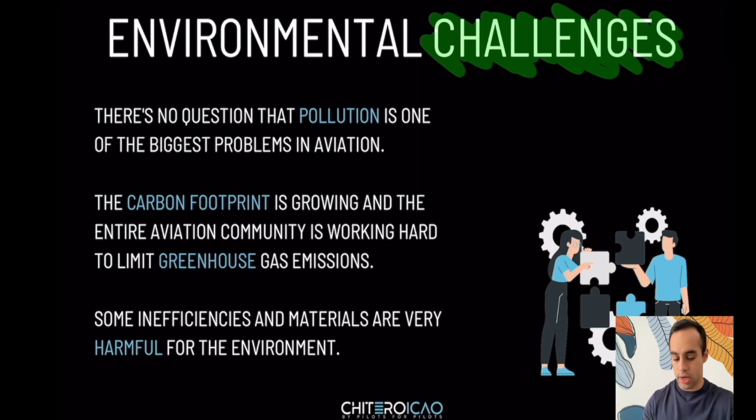I know it's a beautiful paragraph, but what I want you guys to focus on is this, the vocabulary, all right? If you want to write this down, like the main vocabulary, this is something you can do that will help while you're studying. For example, you have your notebook there. You can write something like this: environment. You can have the keywords here.

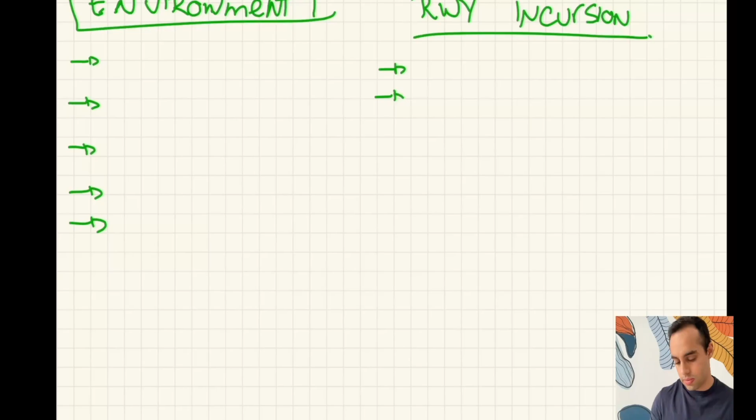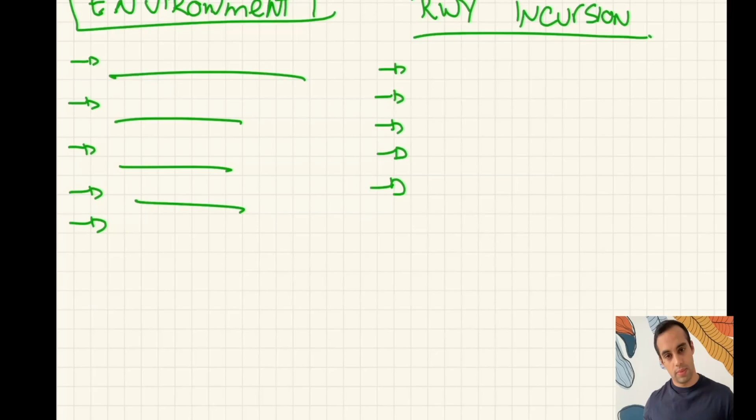And then last class we talked about runway, so you have runway incursion. You have the keywords here. Now what do you have? You have all the topics we normally discuss in aviation and all the keywords. If you have around 10 keywords and you are nervous in the test, you will probably remember 5. 5 is enough to do a perfect test.

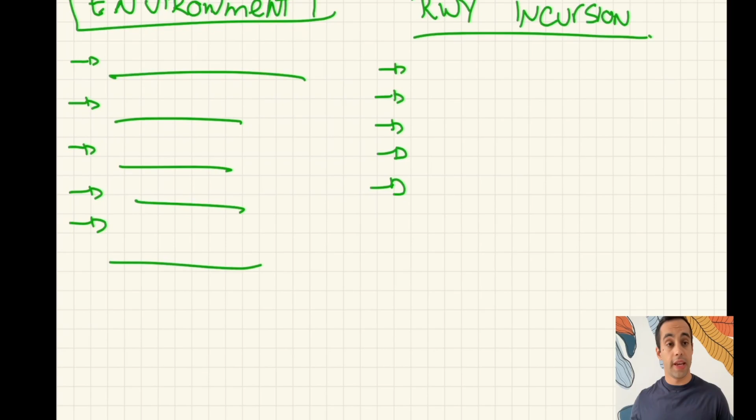Okay, so start writing down all the keywords and all the necessary things so you can pretend you know a lot about the topic. All right, so here I want you to make sure you know, you always mention pollution, carbon footprint, greenhouse gas emissions, and harmful. Harmful means it's dangerous, it's a problem. And guys, help me here: what is greenhouse gas? I know most people never heard about this, and some of you have. Perfect, that's it.

If that's not the translation, I want you to pause it right now and look for the meaning. So normally when we have pollution, we have...

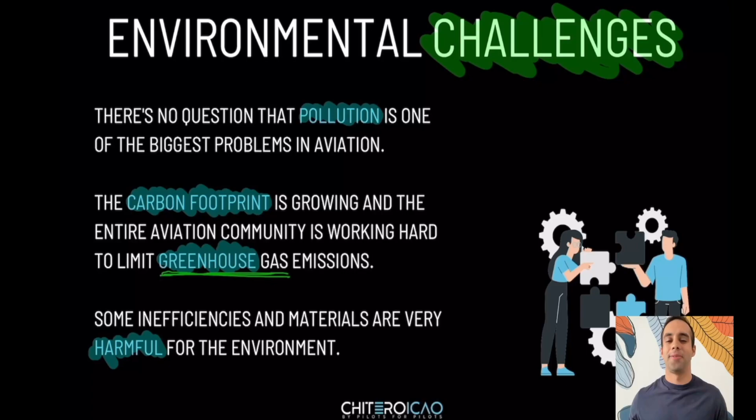Greenhouse gas emissions, and consequently we have a carbon footprint. Carbon footprint is basically a way to measure the impact you have on the environment. And aviation, as we know, we burn a lot of fuel. The noise is beautiful, but we burn a lot of fuel, and actually we are bad for the environment. The emissions and everything is pretty bad for the environment. So this is a way for you to study.

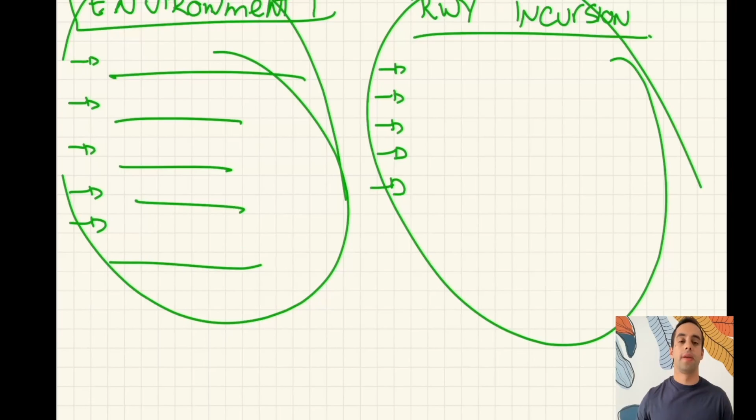Topic, keyword, topic, keyword. That's what I want you to do, right? So guys, when we talk about something as important as environment, flight safety, future, we have some players. We have some people that can help. It's not only one person or one entity that will help.

Now, we hear a lot about the aviation industry. Oh, the aviation industry, the aviation industry. Who belongs to the aviation industry? Who is a part of this? Can anybody help me, guys? Who is the aviation industry? What can we put here?

Manufacturers, beautiful. Companies, perfect. Manufacturers, companies, operators, whatever. What else? Airports. Airports, nice. Any other idea?

Who else? I'm waiting. The clients. No, the clients, I wouldn't put them here because they're the clients. There's nothing they can do. For example... I'm trying to set this up, but I'm just making a mess.

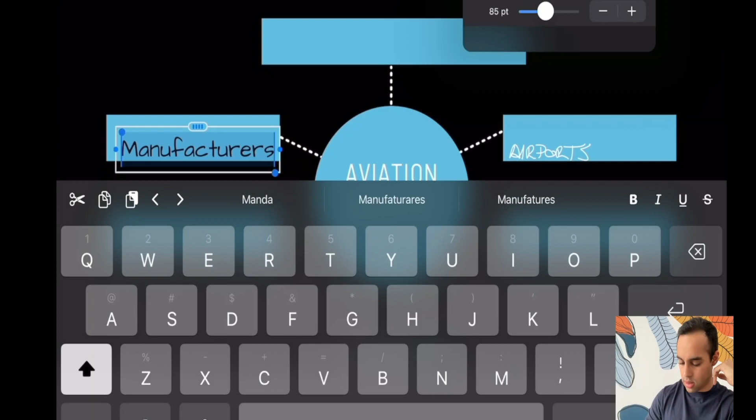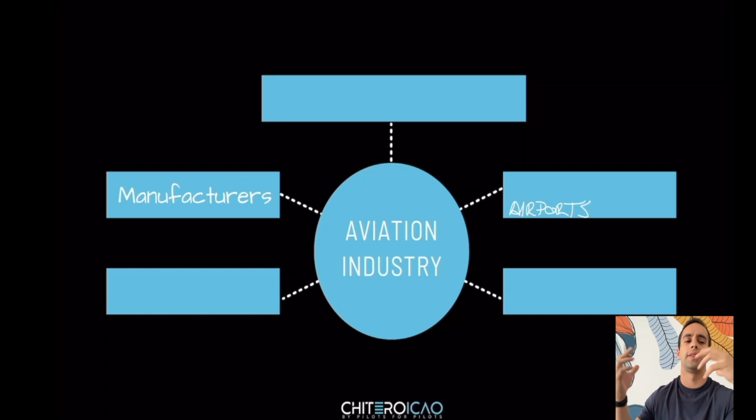So you guys are telling me you are not a part of the industry? You are not a manufacturer. You're not a company. You're not an airport. You're a pilot. So pilots are a part of the aviation industry, right? We can mention, of course, the flight attendants, mechanics, everybody, the personnel, the people. But let's talk about ourselves. Let's talk about pilots here, okay? I'm gonna limit this to pilots because this is a place where we can make an impact.

God, I don't know. I think this is in Portuguese. Okay, that's why. That's why it's correct and everything.

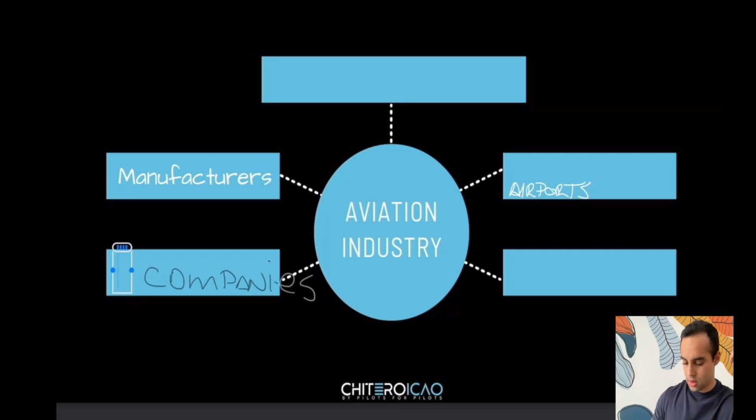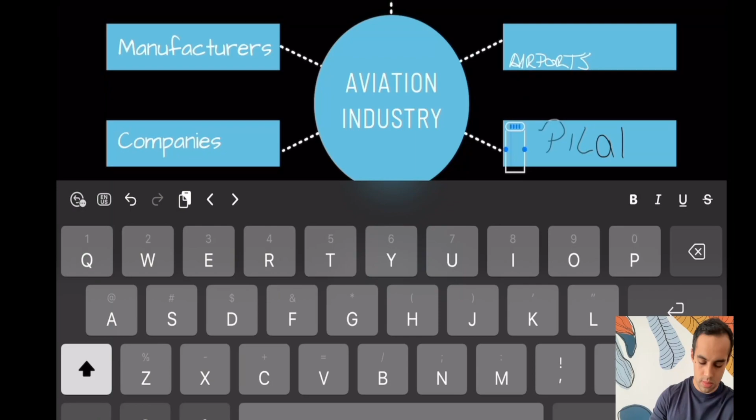So we have the companies, we have ourselves. This is horrible. So we have ourselves, we have the airports, and who is the ultimate one? The one that makes us angry all the time.

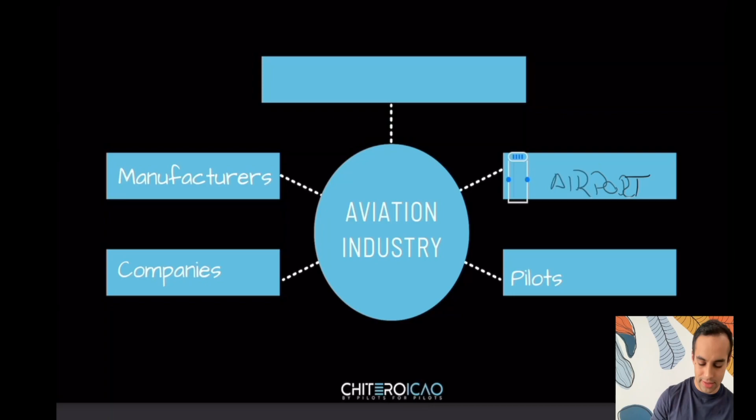Regulations. Good. Who creates the regulations? It's like ANAC, perfect. So those are the aviation authorities. So we have the authorities. Good, they create the regulations.

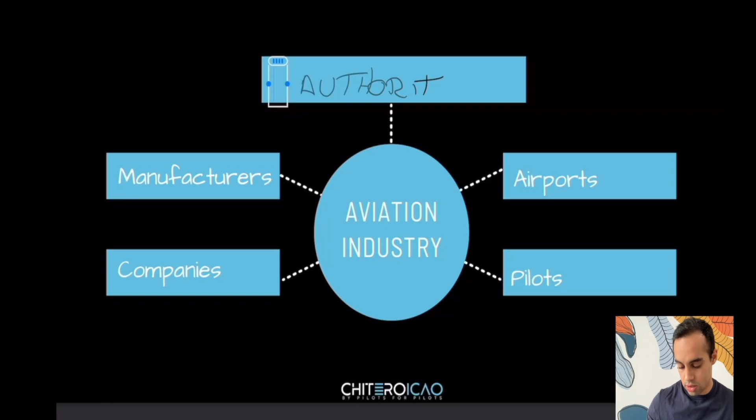So I think it's pretty safe to say that this is the aviation industry. Of course, I might be forgetting someone, as I already said. Pilots are a part of the aviation industry.

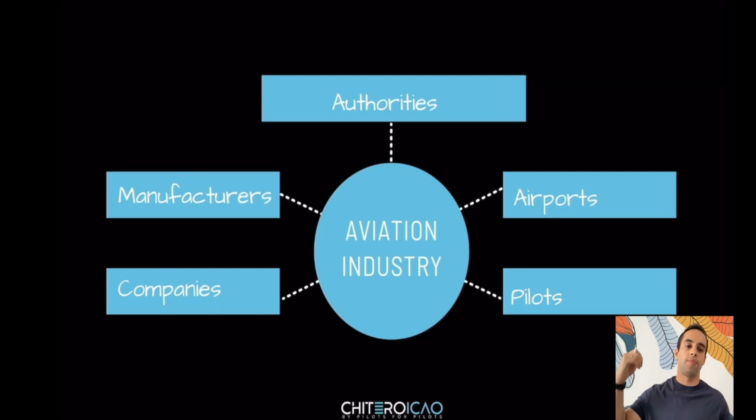This can include everybody, ground staff, people who work in the terminals, with the passengers who load the airplanes, cabin crew, mechanics, supervisors, whatever. Let's talk about ourselves here. So basically for us, the aviation industry will be the authorities, manufacturers, companies, airports, and pilots.

So everybody here has to do their part. And this is important, especially for the test, because as I said, it doesn't matter if the authorities create regulations, pilots don't follow. If the manufacturers create new engines, airlines don't buy. Or if the airports create new procedures and the manufacturers don't comply with it. Doesn't matter, everybody has to work together.

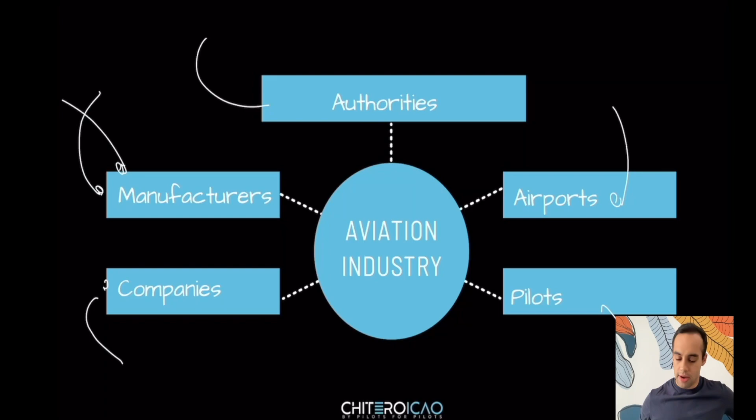So everybody together will shape the aviation industry. It has to be a joint effort. So, for example, of course we might have problems or whatever, but normally aviation authorities, they talk to pilots, they talk to the companies, they talk to the manufacturers. They will create the guidelines, based on this feedback, they will create everything and everybody will do their part.

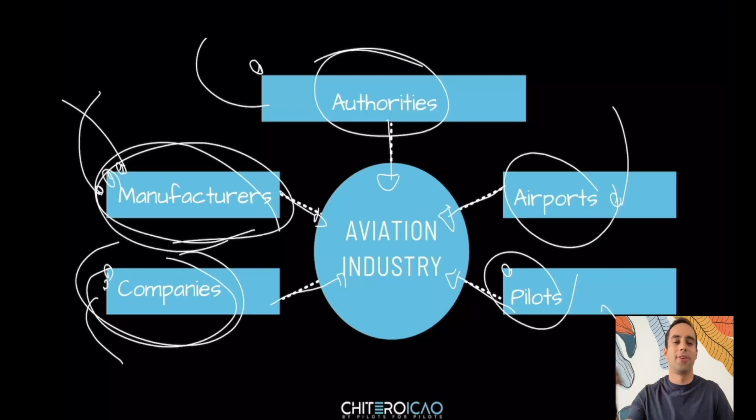The companies have a responsibility, pilots have responsibilities. And just to make this very clear, why are we here? Your company didn't tell you to come here. The authorities didn't tell you to come here. The airport didn't tell you to come here. The only reason you're here is for yourself.

You're here because if you become a better pilot, everybody wins. Everybody wins. So, oh, but my company doesn't pay me a lot, I wanted more money. All right, become a better pilot, change companies, go make more money. Oh, no, but I'm only here because ANAC is telling me to get the ICAO level. I hate English, I don't like the class, I don't like anything. All right, so learn English. Leave Brazil, leave ANAC. All right, so everybody here works together.

Pilots do their part, the airports do their part. We make reports, we listen to reports, and that's how aviation works. There are many pieces involved. It's not only you in the airplane.

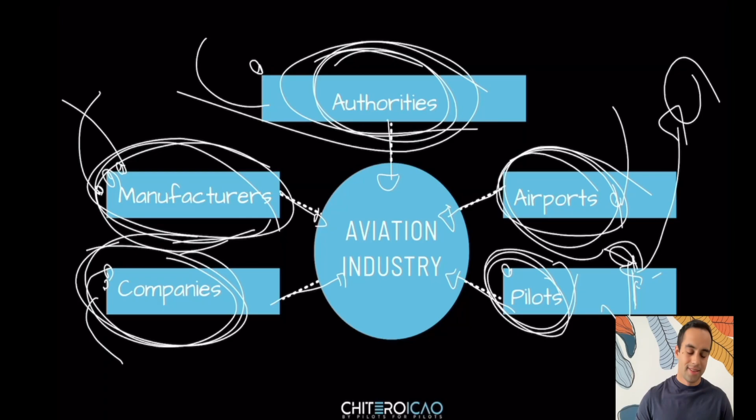The only reason you're sitting in an airplane is because somebody manufactured the airplane, somebody certified the aircraft, someone bought the airplane, and someone gave a place to take off and land. So these are the aviation industry. This is not only for the environmental challenges we're talking about today, it's for everything. When people talk about aviation, what do you think about the aviation industry in the future? We can go point by point.

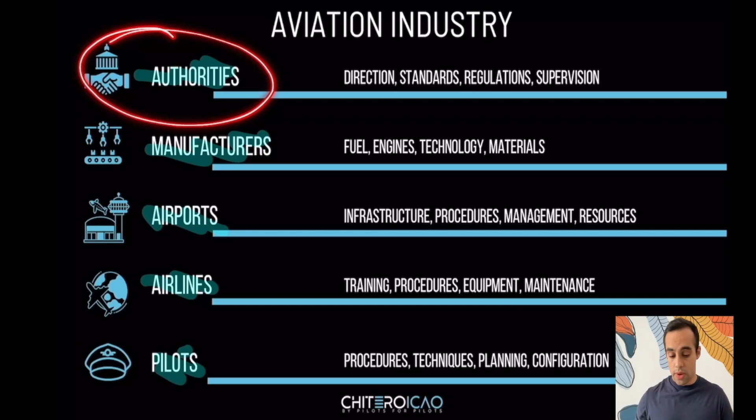So basically, when we talk about the aviation industry, this is the power balance we have here. We have the authorities who will provide directions, create standards, determine regulations, and of course supervise and oversee if everybody's doing their jobs. They can implement fines, they can create incentives. For example, companies that start using environmentally friendly products will receive a bonus, maybe in their taxes, something like that. So they will create the directions and standards, and punish or motivate whoever is doing a good job.

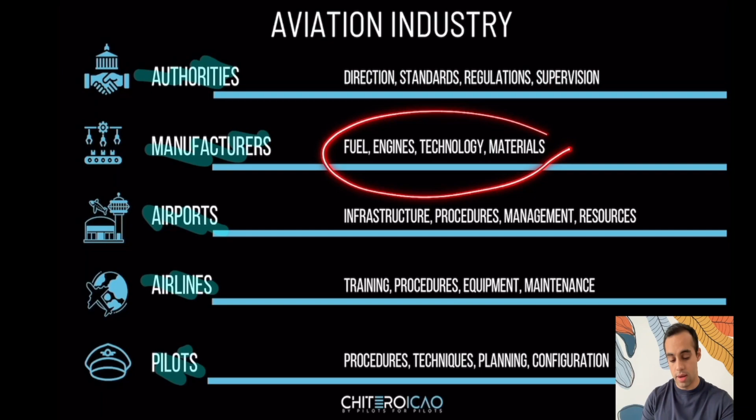Below the authorities, we have the manufacturers, which are basically Boeing, Airbus, Bombardier, Embraer, Cessna, Piper, and so on. Cirrus too, they are growing a lot. The manufacturers will invest in fuel, engines, technology, and materials. They will build what we are using. The manufacturers can be the ones from the aircraft, or manufacturers of navigation systems, or manufacturers of flight screens. So there are many people involved, not only the big airplane manufacturers. They also buy from other companies. So everybody here is investing in technology, material, and efficiency.

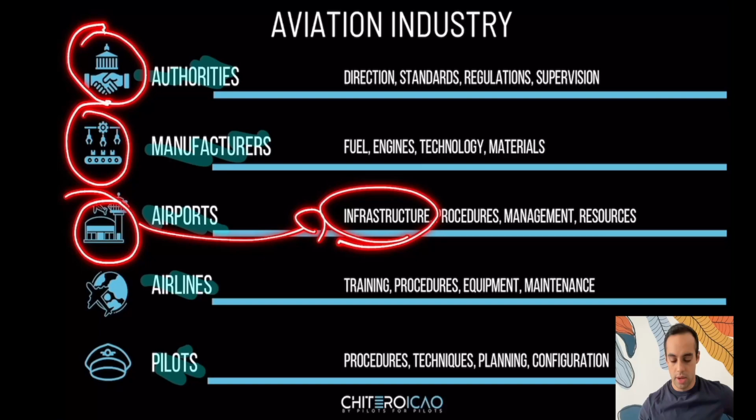After that, we need a place to be, a place to stay. We talked about airports a few weeks ago. And of course, when we talk about airports, we have infrastructure, procedures, management, resources. So if the authorities create good regulations, the manufacturers have the best technology available, but the airports don't have good infrastructure, the procedures are not modern, it doesn't matter — we are going to have a problem here.

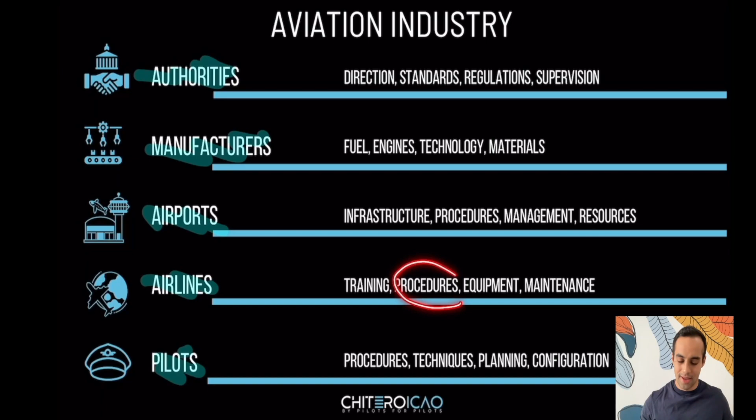And of course, we also have the airlines who will basically pay for everything. The airlines will provide training for the people, establish the procedures, buy the equipment, and perform maintenance. After, right at the bottom of everything, is us — the pilots. Pilots will basically comply with the procedures, implement all the techniques. Everybody here will create guidelines, and the pilots will comply with them. We will plan and set up the airplane.

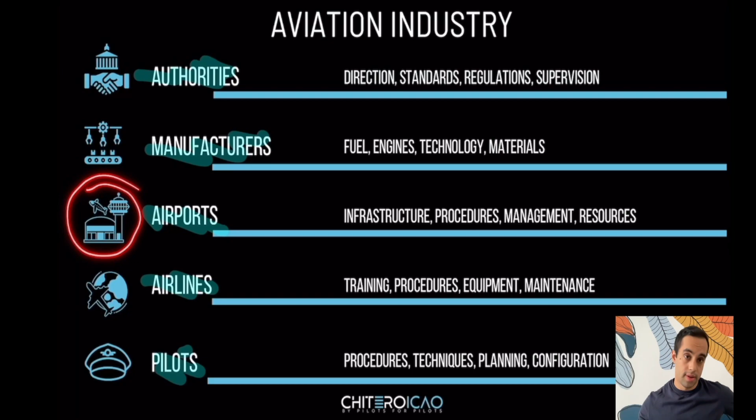So these guys will create the standards, these guys will create the machine, they will write the manual. These guys will get their manual and say, okay, this is the equipment you're going to use, this is how you're going to use it. The companies will say, okay, but here, this is how you're going to do it. The pilots will comply with everything. We have to respect the company's SOP, the airport layout, the airport's procedures, also talk to the manufacturers, and of course, everybody's under the aviation authority.

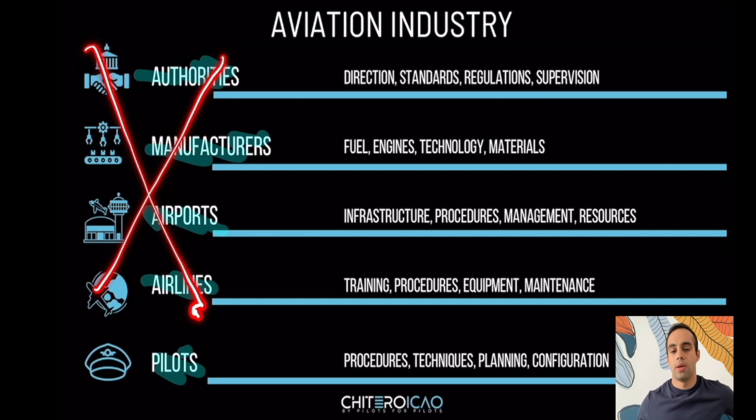So this is the aviation industry. When they ask something about flight safety, you can go point by point, choose one and talk about that. For example, how can the aviation industry increase flight safety? Well, I don't know a lot about the industry, I'm only a pilot. But as a pilot, I always respect all the recommended procedures, I use the correct techniques in my airplane, I plan and calculate everything before flying, and I try to maintain a good configuration during the entire flight. That's what I normally do to contribute to flight safety.

Aviation industry — I don't have to talk about everybody. I am the aviation industry, I'm the pilot, okay guys. So that's how we talk about this generalized question. We narrow it down, bring it to our reality. We can answer anything, okay.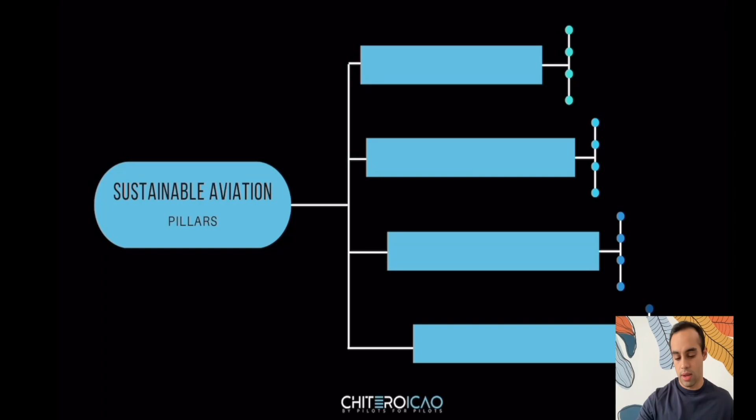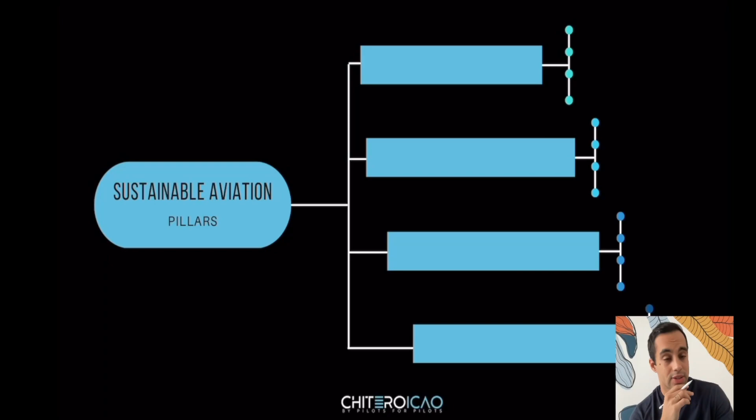So, getting back to our topic, we already know who belongs to the aviation industry and what the aviation industry is all about. Let's get back to our topic and talk about environment, pollution, carbon footprint, and sustainable aviation. Guys, there are some pillars, some things that will contribute to sustainable aviation. Does anybody know how we can improve or implement environmental solutions in aviation? Any idea? Biodiesel? Right, biodiesel. So we can invest in fuel.

Fuel is the biggest one. Development, faster routes. Perfect. All right, so we can change the way we operate.

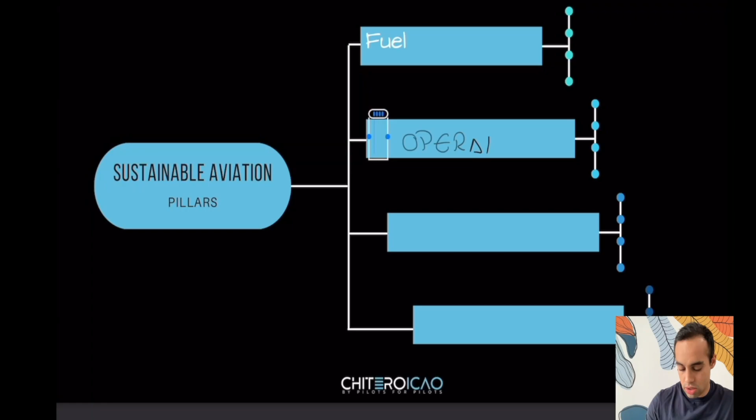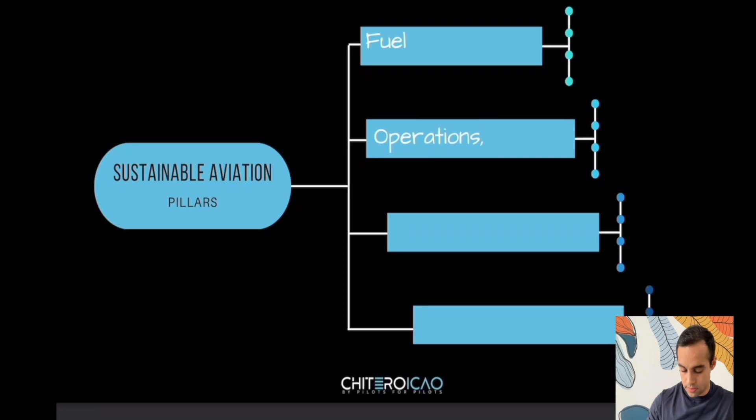New materials, beautiful. So it's the same thing as Dario said. Dario just put here in the chat new engines, and you said new materials. So we can talk about technology, and what else guys? We can invest in fuel, we can optimize our operation, SOP, we can invest in technology. And what else?

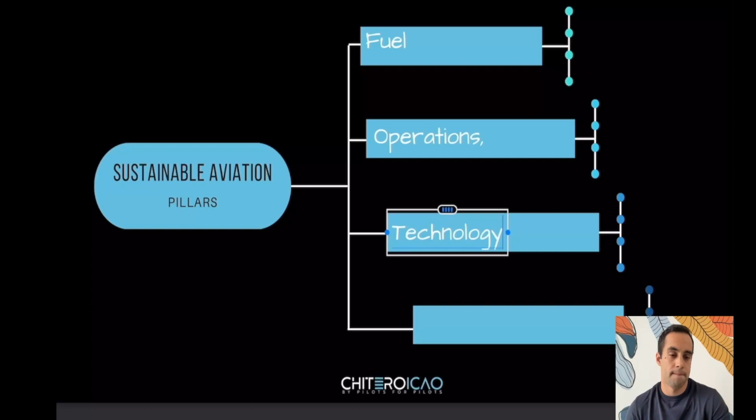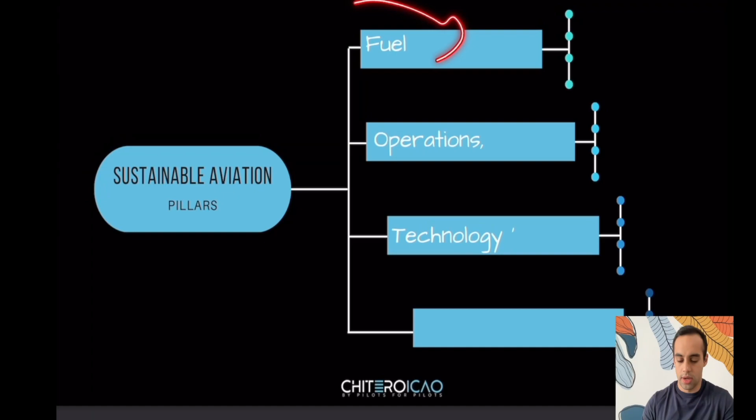New routes, such as AirNav. Yes, this will come into operations. There's one thing you guys are not considering - this is from the manufacturers and the companies. Fuel, we can change the fuel we use, it's the biggest concern. We can optimize our operation, we can invest in technology with electric planes, new materials, more precise systems. And this is not up to us - we can make solutions, we can provide recommendations or guidelines, but we cannot implement these as pilots. We can talk about infrastructure.

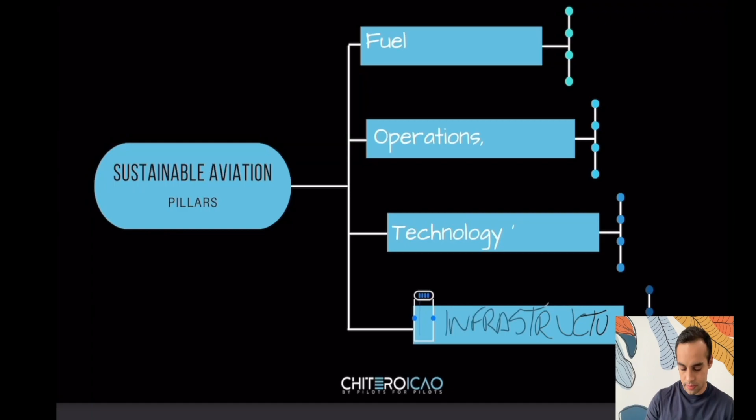Imagine one thing here - this is a big point as well. So imagine you are flying an electric plane. You have the fastest route possible, the best GPS, everything is perfect. But you stay 3 hours taxiing before taking off.

We need infrastructure, or the flight is perfect - we are using biodiesel, which is 70% less harmful for the environment, we are flying - when we get to a major airport, we have to hold for 2 hours before landing. So everybody has to work together, okay? So we need investments in fuel, and I put fuel here, but I'm talking about everything we use in aviation.

We have to improve the operations, we have to invest in technology, and we need good infrastructure. We need bigger airports, we need efficient procedures. So imagine everything's okay, the airport is big enough, but it only operates visually. The weather is bad, we're going to have to alternate more flights, more fuel, more hassle.

So when we talk about sustainable aviation, I want you guys to always have in mind fuel, operation, technology, infrastructure, right? So let's make a breakdown of everything, and in the end I'm going to fill in these gaps for you. All right, we're going to know a lot more about this topic, guys.

Before I continue, any questions? Everything okay? Can I continue? Sure, yep.

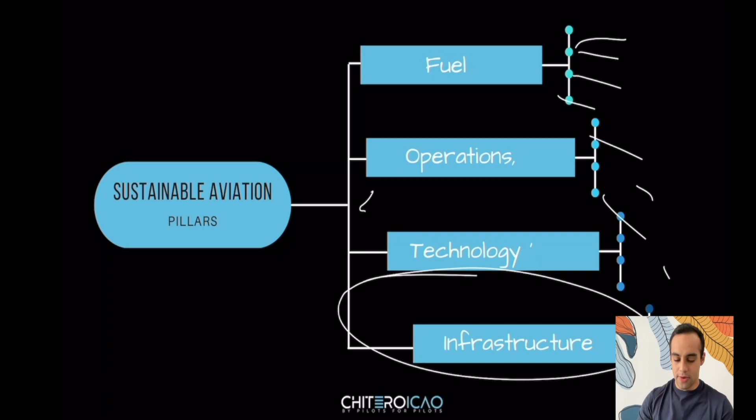We can start with the infrastructure. Is it the main system in aviation, or no? I wouldn't say there's a main one, because everything has to work together. For example, imagine we have a great infrastructure, but you are flying a Navajo - doesn't matter, you're still going to harm the environment. You know, everything has to work properly. You are flying a great airplane, your biodiesel and everything, but you have the worst route possible - it's not helping as well.

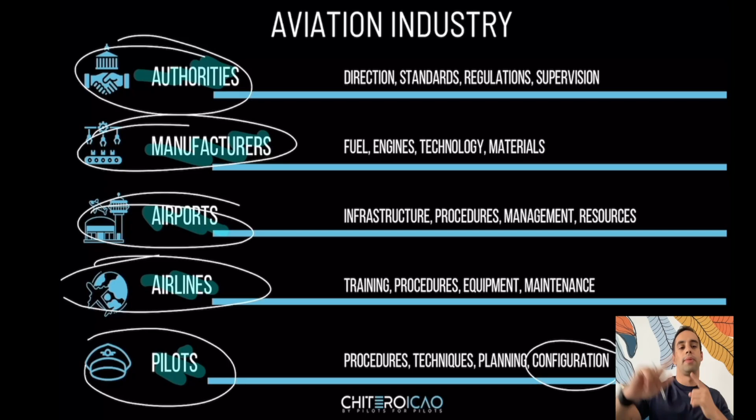So now I want to make a breakdown of everything. Let's start with the technology. So when we talk about technology, actually, this is one thing that always fascinates me with aviation - it's basically one of the most technologically innovative sectors in the world. And of course, new technologies are here to help, to increase flight safety, reduce the costs, and be more environmentally friendly.

So they also decrease the greenhouse gas emissions. So aviation is already a very technological area, right, since the beginning of times. And when we talk about technology in aviation, actually what we are talking about is fuel efficiency. They research materials, they change the engine's performance, they change the fuel. We are always looking for efficiency, all right?

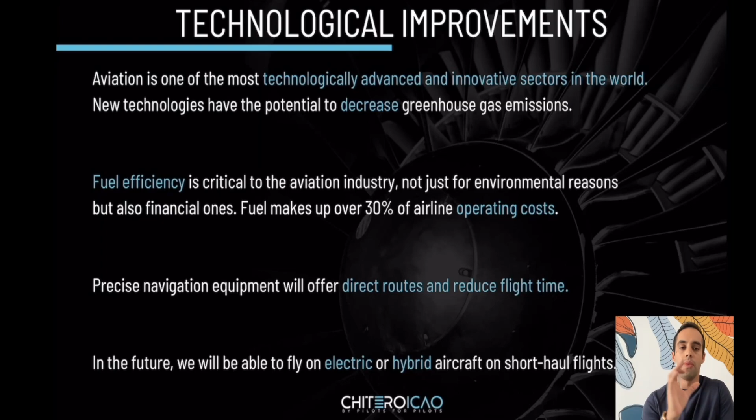So fuel efficiency is critical to the aviation industry, not just for environmental reasons, but financial ones. Fuels can take over 30% of airline costs - this is in America. In Brazil, I think it's going to be around 40, 50, because they have dollars and reais and they have the currency exchange, right? So I put just here an average. So the good thing for the environment is that if we become more efficient, flights become cheaper. So now everybody wins.

The environment wins, the industry wins, the companies win, the airports win, pilots win, everybody wins. That's why we are seeing so much effort, so much investment, so many people working in making the aircraft more fuel efficient.

When I talk about fuel efficiency, I'm talking about everybody, because it doesn't matter if the engine is very efficient, but the pilot isn't. The pilot is very efficient, they're flying on Navajo - not gonna work. Everybody has to be efficient. So fuel efficiency is not only with the engine, it's with the entire operation. We need to be efficient, all right?

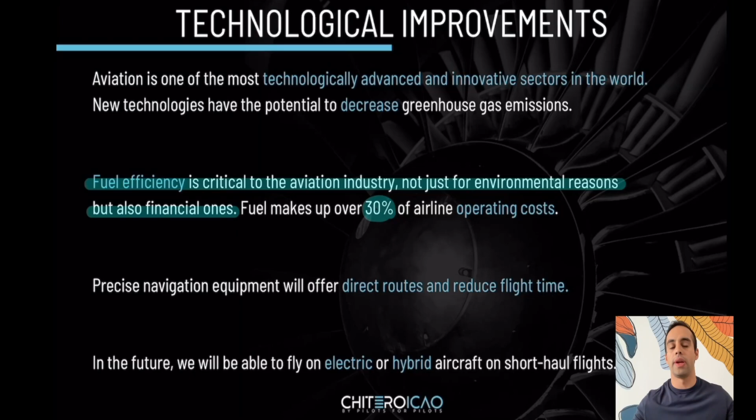So we talk about fuel efficiency. We can also talk about precise navigation equipment that will provide direct routes and reduce the flight time, right? And in the future, we'll be able to see electric and hybrid aircraft on short-haul flights.

I might be wrong here, but I think there is an electric aircraft being used for flight training. I think in Brazil, they started it, or they will start. I saw something like that. It's like a small airplane, looks like a Cessna 152 or whatever, and it's fully electric, right? I've been seeing these airplanes. Am I right? Does anybody know about this?

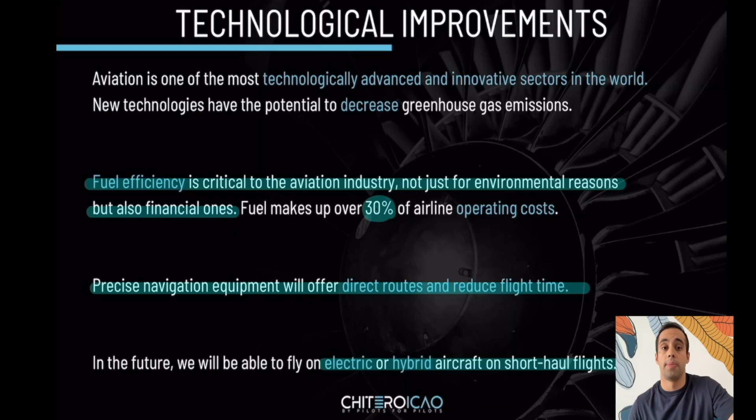So yeah, I think that some companies are investing in electric airplanes. Personally, I think it's possible. It's very hard to imagine an electric Airbus A330, for example, or an electric 777 because of the battery weight and everything. But when we talk about smaller airplanes, I think it's possible, I think it's doable. So I think that in the future, we will see some electric regional airplanes, especially for recreation or something like that. I think that it will be a future.

So when we talk about technological improvements, we're talking about fuel efficiency, so better engines. The engines will be more fuel efficient. Navigation will be more precise, so we can reduce flight time with direct routes and also low visibility procedures, so we don't have to alternate and hold so much. And in some aircraft, we might even see some electric or hybrid engines. All right, this is the first topic.

Second topic, we have the famous SAF, which stands for Sustainable Aviation Fuel. I don't know how much you guys research about this and how much you know about it, but every time I open an aviation blog or something, they're saying Air India is investing $1 billion in SAF, United Airlines just bought a company that produces SAF. SAF stands for Sustainable Aviation Fuel.

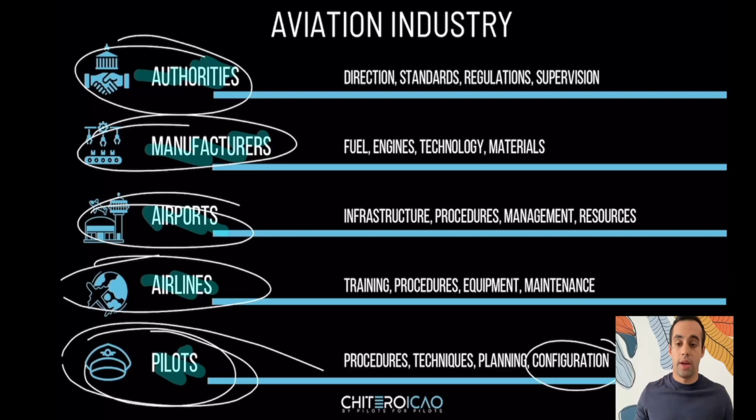It's a kind of biodiesel, biofuel. There are many different versions. Everybody's looking for the most efficient one. And this is normally something that's not up to the pilots. I don't see a pilot that will decide the fuel they're going to use in the airplane. That's up to the manufacturers, the companies, and the aviation authorities. But again, everybody's working together. And the airports, they need to provide this, right? It doesn't matter - everybody creates something and you cannot refuel in the airport.

So when we talk about sustainable aviation fuel, we are actually talking about the development - this is the word I want you to use - the development of alternative solutions that could be sustainable. This will, of course, contribute to the emission reduction strategy of aviation.

Since the first biofuel test flight on commercial aircraft took place in 2008, there has been a huge amount of work. So we had one aircraft, we had one flight 15 years ago with the first biofuel, and nowadays it's becoming more and more common. Hopefully every fuel is going to be environmentally friendly in the future.

So biodiesel is starting to show great potential on smaller jet airplanes. When we talk about an A380, a 777, a 787, it's a different game. These airplanes operate differently because of the amount of fuel. So we need to go step by step, right?

And aviation fuels have great potential for securing sustainable growth because they're cheaper, they reduce operational costs, and of course, they're good for the environment. So I think that the company or whoever the manufacturer gets the best biofuel will run the game for a while. So I think that this is why everybody's running, because we know it's possible.

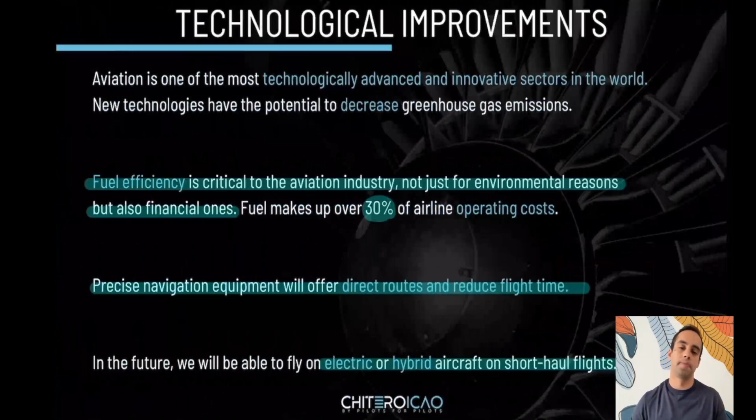We know we can change the way airplanes are fed with fuel, but we still don't have a perfect model. So I think that's one of the biggest things. Again, technological improvements, fuel, also very important.

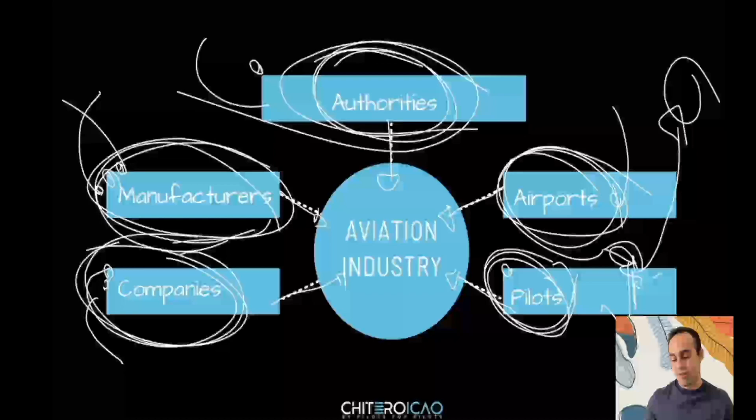So companies have taxi in, taxi out, one engine procedures, and we turn on the airplanes with an auxiliary unit. Airlines are saving fuel through more efficient operations, and this can range from ensuring the plane's engines are clean to developing and using new arrival procedures. Look how funny this is: sometimes people are investing so much in fuel, thinking we need the best fuel possible, the best technology, but we also need to make sure that the engines are clean. Everything else can be perfect, but if the engine's dirty, it doesn't matter. That's why everybody here has to work together, everybody has to do their part. They create the best fuel, the best guidelines, and whatnot, but if the engine is dirty, it's not efficient enough.

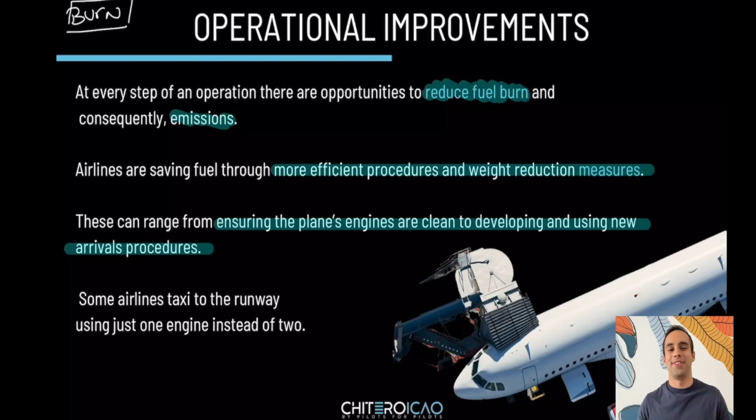We can also say that some airlines taxi to the runway using just one engine instead of two. I think most companies use this today, taxiing with only one engine while the other is in idle, a taxi in, taxi out procedure. I don't think it's mandatory, but that's a way companies do it. And this is what's funny: it's not really for the environment, that's okay, that's fun, that's nice, but mainly because it reduces the costs. So everybody wins, as I said, it's a win-win.

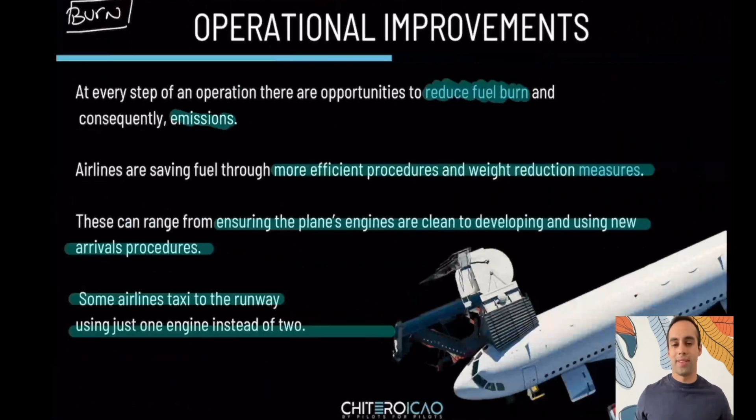So, operational improvements. Basically, we have many areas that can be improved. First of all, when parked at airport gates, aircraft must be powered to provide air conditioning, electricity, and also engines.

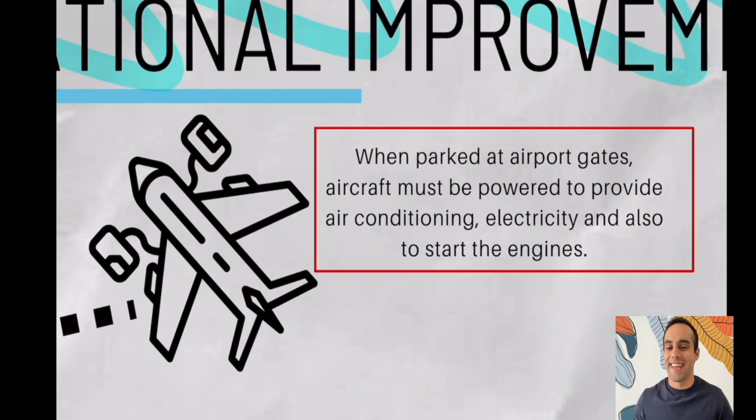This is not done by the engines. It's done by the ground power unit. However, some of them still use fuel, but some are electric already, so it depends on the electrical source. When aircraft are parked at the gates, they can provide air conditioning, electricity, and everything without starting the engines. We have the units to help us.

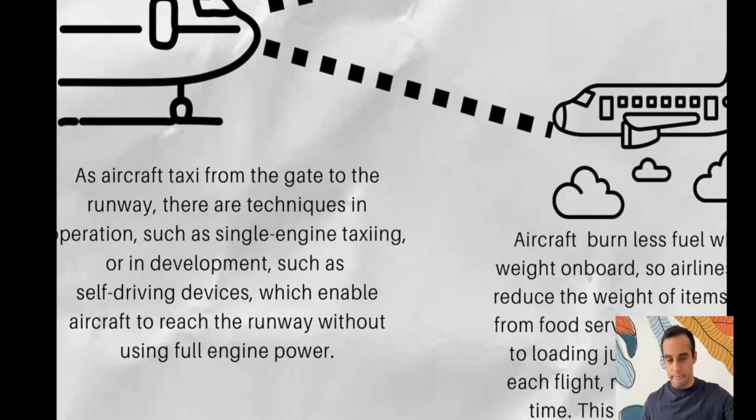After the airplane is loaded and the passengers have embarked, we are going to taxi. As aircraft taxi... this is not good here. Oh, I don't know why. I just lost something here.

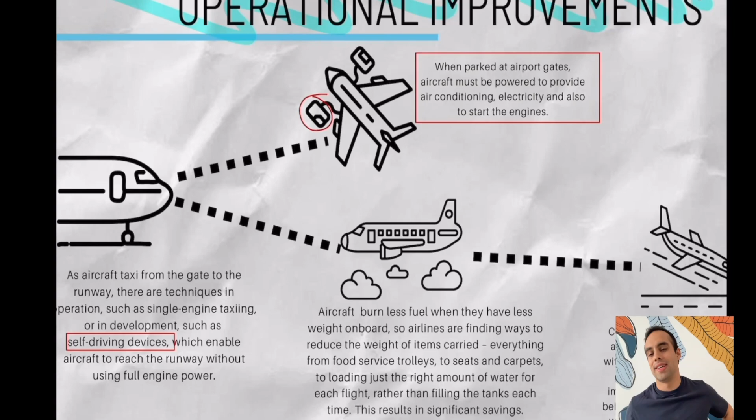As aircraft taxi from the gate to the runway, there are techniques in operations, such as single-engine taxiing or the development of self-driving devices, which enable aircraft to reach the runway without using full engine power. I've seen this already. Doesn't work very well, but people are trying. There have been studies and some attempts of aircraft going to the runway without the use of their engines, because an aircraft needs a lot of power to move.

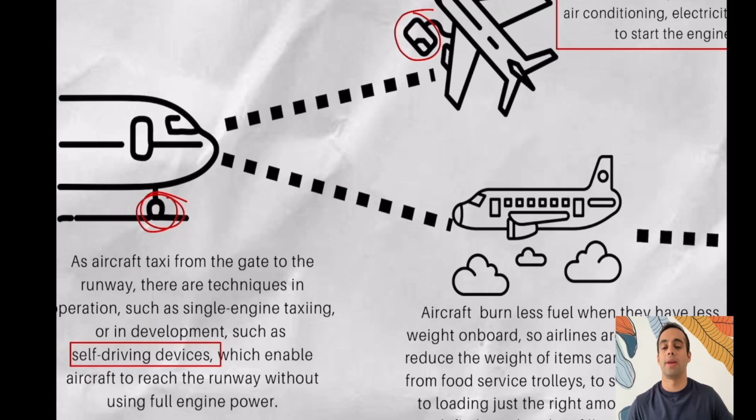So it's basically some electric cars attached to the nose wheel. They will move the aircraft until the runway, so they will not have the engines on. This will save around 2 tons of fuel per flight. It's good. It's not working very well nowadays, but people are trying.

As Wilson told us, we have the taxi in, taxi out procedures, which is basically single engine taxiing. Of course, we need to avoid ground delays. So, for example, if there's a long line for takeoff, there's no reason to push back. Just wait for everybody to go, and after that you can push back and leave.

Especially at some airports around the world - I know JFK gets pretty chaotic. Sometimes pilots cannot take off because they need to wait for their refueling truck, since they've been waiting for takeoff for so long that they need to refuel before going. So that's up to the airport operation as well.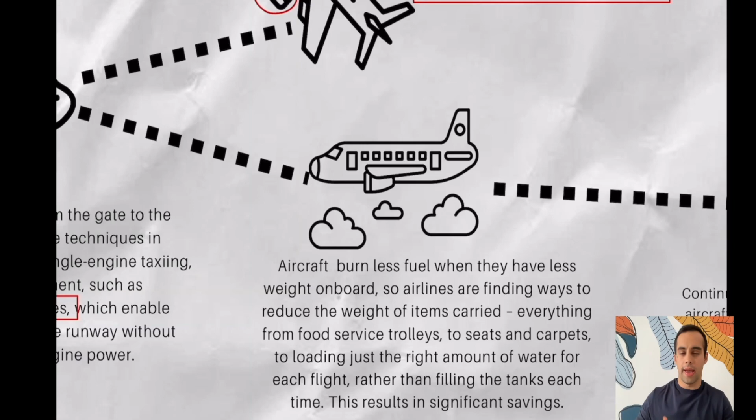After takeoff, aircraft will burn less fuel when they have less weight on board. So airlines are finding ways to reduce the weight of items carried, everything from food service to seats and carpets, to loading just the right amount of water for each flight. Everything counts. Rather than filling the tanks each time, this results in significant savings. With less weight, the aircraft will burn less fuel.

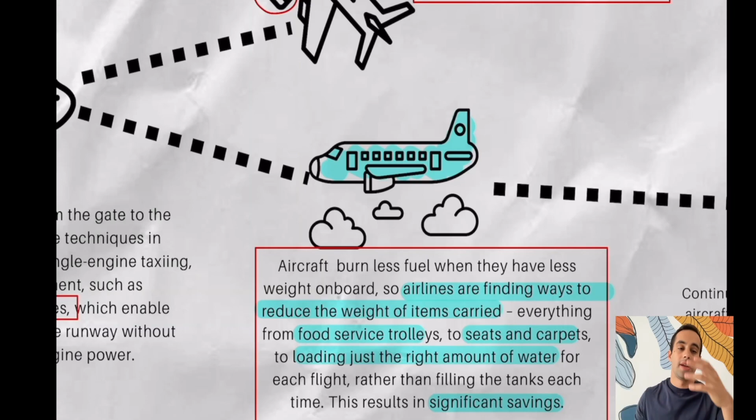Everything matters, even the color of the airplane has an impact on the savings. So they always choose the color, the amount of paint and everything to improve operations. Ultimately, everybody wants to save money, and consequently, we are going to be environmentally friendly too. So airlines can reduce the weight and change their operations.

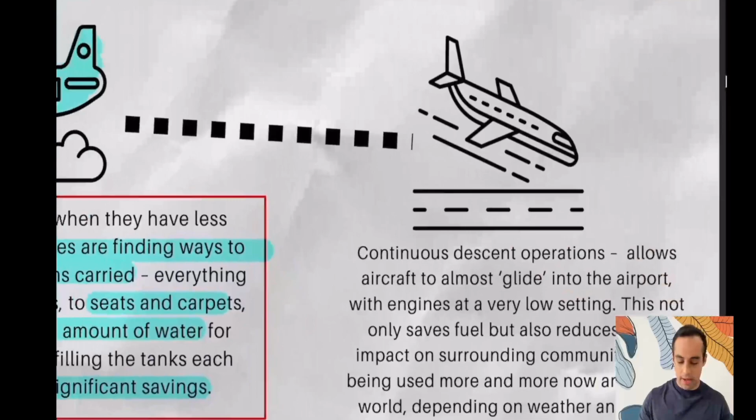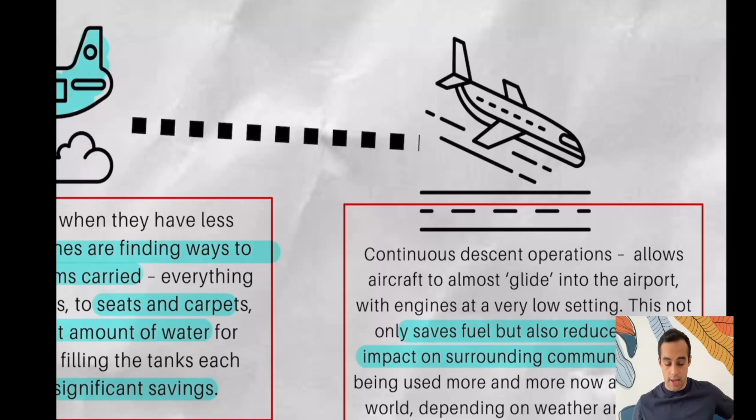Finally, we have the continuous descent approach. We have continuous descent operations, allowing aircraft to almost glide into the airport with engines at a very low setting. This not only saves fuel, but also reduces noise impacts on surrounding communities. It is being used more and more now around the world, depending on weather and traffic conditions.

We normally descend with engines almost on idle. This is good because it saves fuel, and it also respects the famous noise abatement procedure. I think it's in Frankfurt, right? We have one of the longest approaches, and the engines are almost off - you can even hear the air going through the wings.

I don't know if anybody here has ever landed or been to Frankfurt - let me know. I think they have a very optimized and incredible noise abatement procedure there. It's just a continuous descent with the engines almost in idle. This is very nice because it saves money, saves fuel, and of course respects the abatement procedure.

I know about Frankfurt. Frankfurt is almost silenced. It feels like the airplane is not even on anymore.

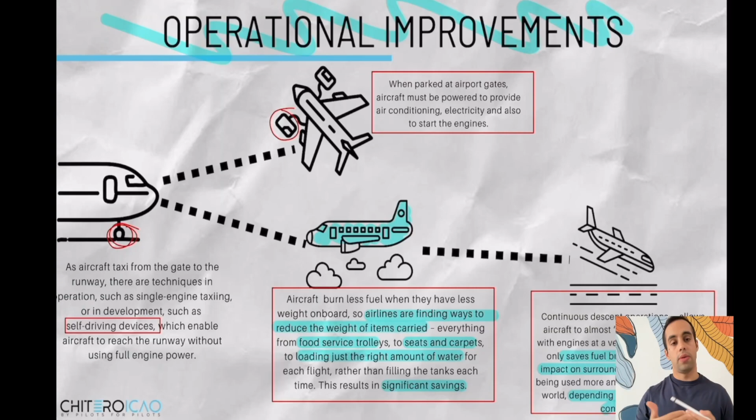We are just calling. So guys, operational improvements. This is the area that matters the most for us. I'm going to give you the tip how to. Here I'm showing you all the content. After I finish the recording, I will show you how to show this in the test. All right guys, technology, operation, fuel, everything counts.

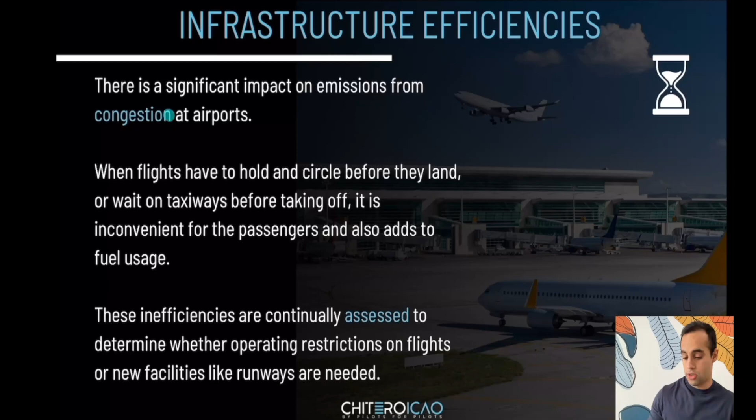Last but not least, we'll have to talk about infrastructure efficiencies. If everything's okay but you have to hold for 1 hour before landing, you just lost all your efficiency. There's a significant impact on emissions from congestion at airports, when flights have to hold or circle before landing, or wait on taxiways before taking off. It's inconvenient for passengers and adds to burnt fuel usage. These inefficiencies are continually assessed, meaning everybody's working to determine whether operating restrictions on flights or new facilities like runways are needed. For example, let's take the corporate jets out of Congonhas, because of the amount of weight and everything like that. Everybody's always studying how to better optimize, how to reduce delays, holdings, and whatever.

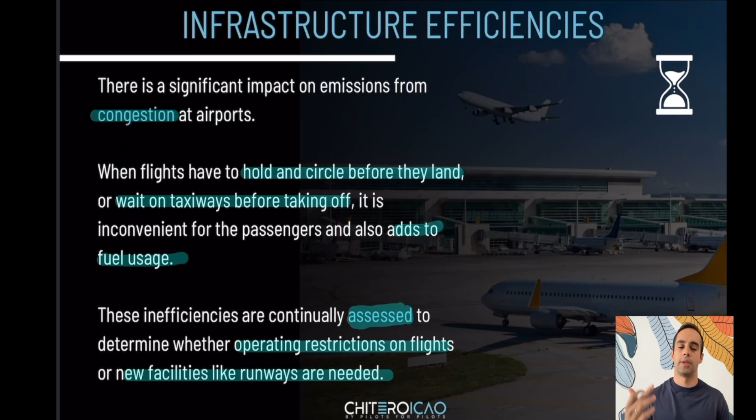Right guys, until now, easy work. Let me see. All right, that's it. These are the areas we are going to work on. As we've established beforehand, technology, let's do a checklist here.

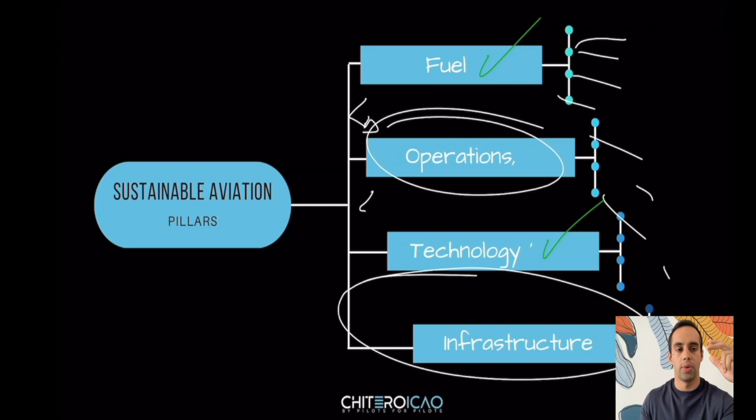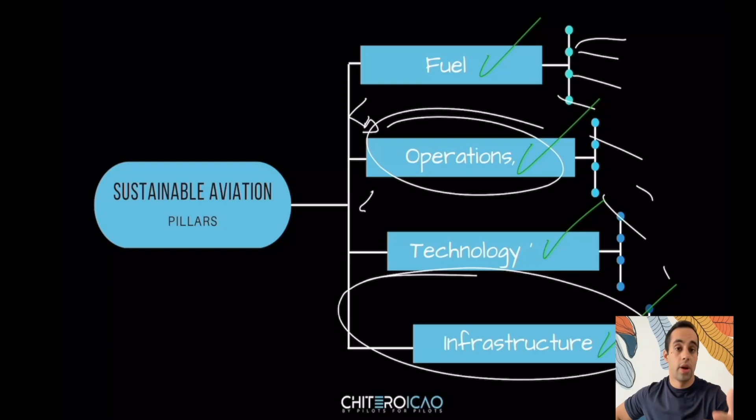Technology done. We invest in new fuel, in new engines, right? Fuel efficiency, GE90 is perfect. Precise navigation, we search for alternatives with biofuel, biodiesel, the SAF - Sustainable Aviation Fuel. We optimize operations by establishing new standards, new procedures, and airport authorities do their part and change how we operate, who can operate at each airport, flight time and everything. So this is what we can do as an industry to contribute with environmental solutions. And this is exactly what we had here already.

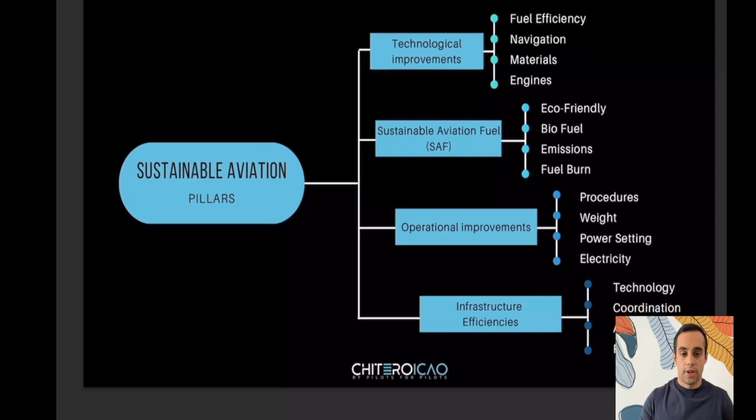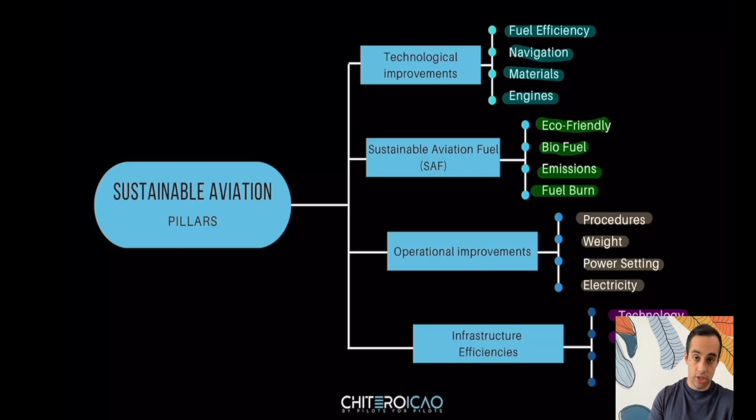So, sustainable aviation pillars. This is very nice for you to print - if you want to print, tag me on Instagram, I'm going to repost you guys. When we talk about the sustainable aviation pillars, we have all these, okay, and these are the keywords I want you to have. When we talk about technological improvements, we can mention fuel efficiency, navigation, materials, engines. We talk about SAF - eco-friendly fuel, biofuel, emissions, fuel burn, operational improvements. We're actually talking about procedures, weight, power setting, and electric engines as well. And when we talk about infrastructure efficiency, we are mentioning technology, coordination, airports, and routes. Everything has to come together so we have sustainable aviation, all right?

Hard topic. I know most people are not very fond of environmental solutions. Not my area - I just want to burn fuel and take off. But I mean, it's important for us, it's important for our growth, so we need this.